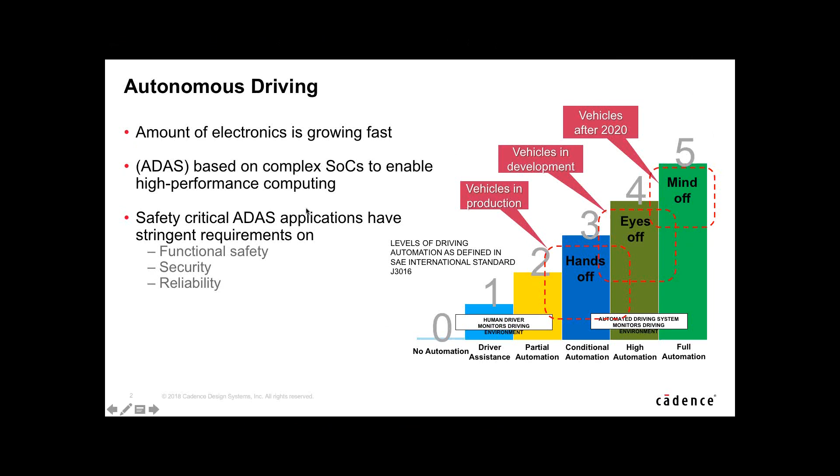As I think you've seen, the foundation standard for automotive safety is IEC 61508, and it has generated a number of standards around it that are all derived. And 26262 defines the processes we need to follow for safety verification, and it alludes to the system and functional verification as well. The overall system performance necessary, the documentation needed, and the tools compliance process. Today we're going to focus primarily on the safety verification aspects.

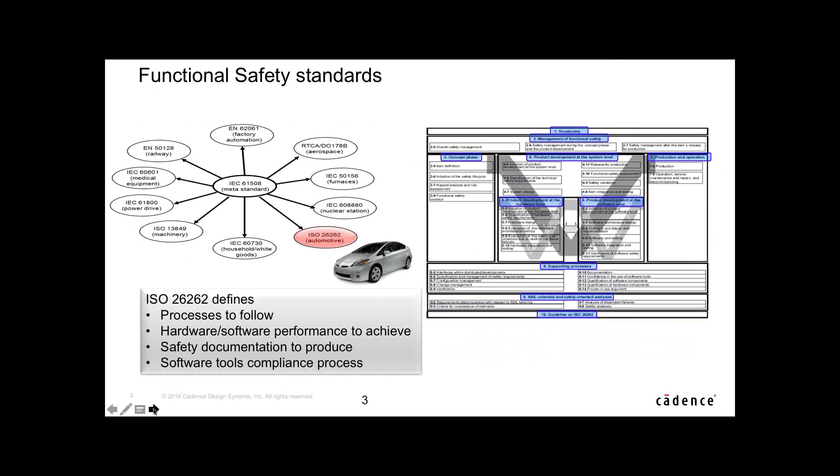Now, what we will address, and I think you've heard from some of the other presenters today, is a lot of the safety analysis that's been developed in the processes, the process we're talking about here, is 40, 50 years old and longer. The whole failure mechanism, identifying the effects, the diagnostics, this is a long-held process. TÜV SÜD, as OneSpin has represented before me, has been in business, I believe, for about 100 years, looking at safety systems. So it's not a new concept.

What we're all addressing, though, is the level of precise information that we need to generate in the semiconductor space, because the number of points of failure in these types of systems is much, much higher than we've seen in the mechanical systems that led to a lot of these standards.

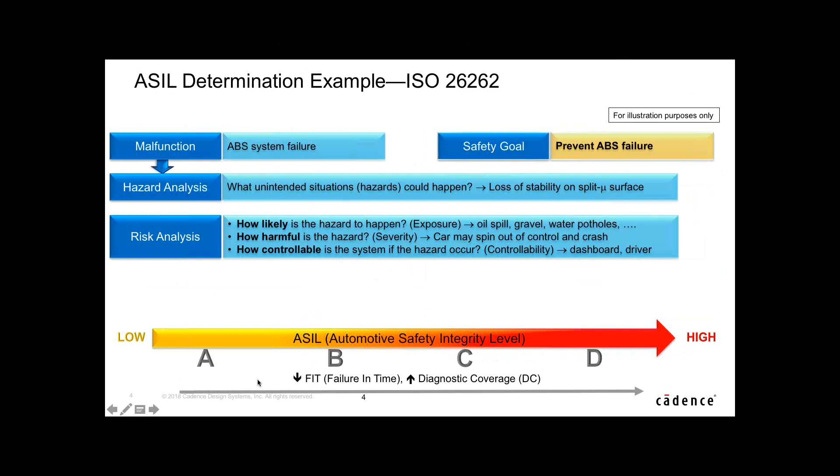So the safety principles: there's systematic failures, like a software bug. This should be addressed by processes of planning, the documentation, the specification. We need to make sure that systematic failures are essentially designed out and hopefully verified out of the system. Given stability in the systematic environment, there is always the possibility of random failures. Component malfunction, noise injection, aging. These are all different aspects. They may be permanent, they may be transient effects, and we need to define safety mechanisms in order to catch and observe these failures and then provide an appropriate system response.

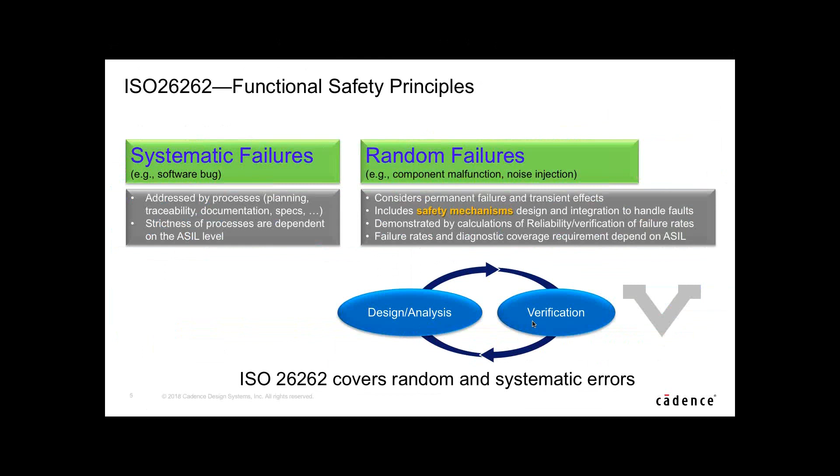The ability of the safety mechanisms to identify those failures is calculated into the reliability and verification rates, and we need to identify a diagnostic coverage requirement based on the ASIL that we define. So the ASIL is defined primarily on the potential failure, the diagnostic coverage, the failure rates associated. We need to make sure that the system can live up to that ASIL level. And that's really the challenge. And that's why you see that circulation here between the design analysis and verification, is that these elements are kind of co-developed, and we need to make sure that the system is whole between those two.

So what is the functional safety analysis? The definition of failure modes as we described, the determination of safety mechanisms, right? So we have to have a balance, right? And the balance here is that there needs to be sufficient safety mechanisms to achieve the ASIL level that we've defined, but we also need to maintain system performance, area, power, right? The normal constraints of the design itself.

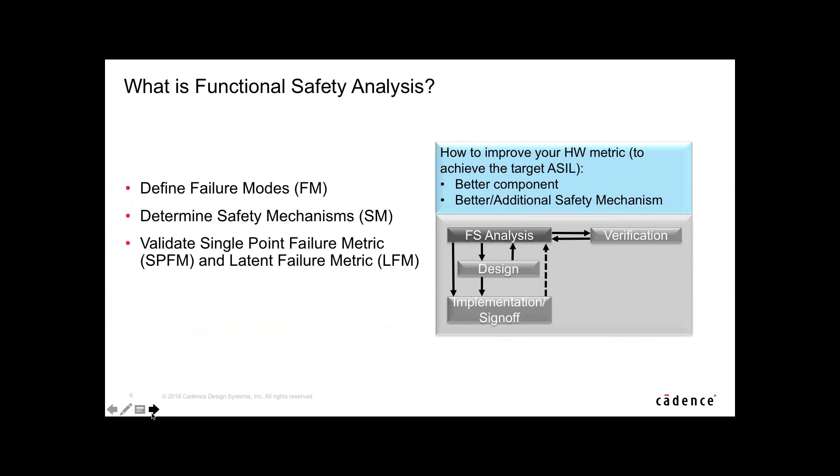And that's the balance that we need to achieve between the kind of systemic verification and the safety verification in our system. So defining functional safety, the typical approach, again, and this is the practice that's been conducted for decades in safety-related systems, is very structured. And it needs to be structured in part to make sure that we've obviously built this correctly, but it needs to be structured for audit and for failure checking should something go wrong in the system as well. Right? It's part of the documentation approach, is that it is structured throughout the process.

So define the failure modes, the mechanisms, the diagnostic coverage, feeding into the safety analysis, like a failure mode effect diagnostic analysis, and then generating the hardware metrics to demonstrate that we've achieved the goals of the FMEDA. Right? And you can see the ASIL levels and the appropriate failure rates. Right? This is straight from the ISO standard.

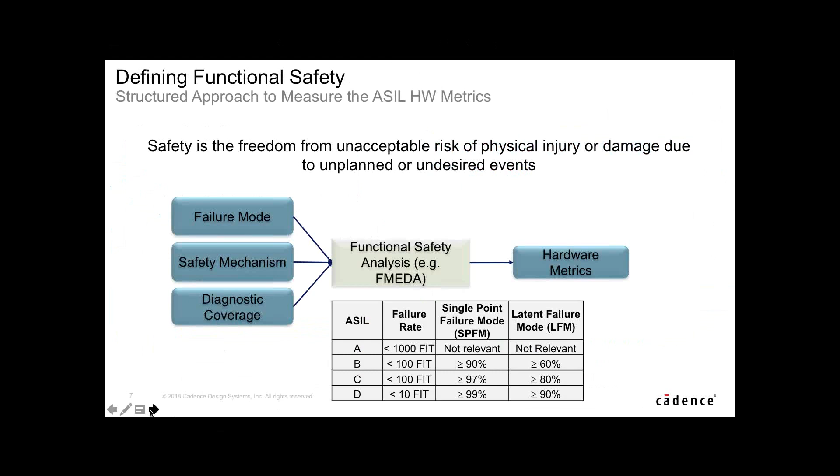So the importance of failure modes and failure mode effects and diagnostic analysis. It's a requirement in 26262. It's a requirement in the other related standards as well. Again, it's not a practice localized to 26262, but it's needed to verify the number of safety mechanisms, right, because they're connected to the failure modes themselves, and whatever diagnostic coverage properties are claimed, right?

So without automation, right, one way to address this is to have a safety expert analyzing the system using a statistical analysis, using historic trends, and identify a claimed diagnostic. That isn't sufficient, certainly in the level of complexity associated with a semiconductor.

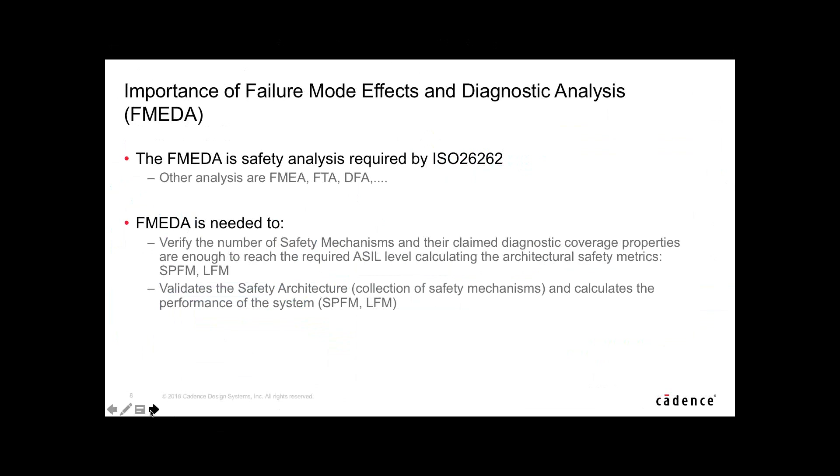And our observation over the past several years, we've been building technology in this space since 2013, is the requirements coming from the OEMs to the tier ones, to the semiconductor, to the IP providers, even to us as EDA, are increasing. There's an increasing need for detailed, calculated analysis. And I think you've seen some of that from my colleagues in the previous presentations. So what do we need to do? Well, we need to capture and analyze the goals.

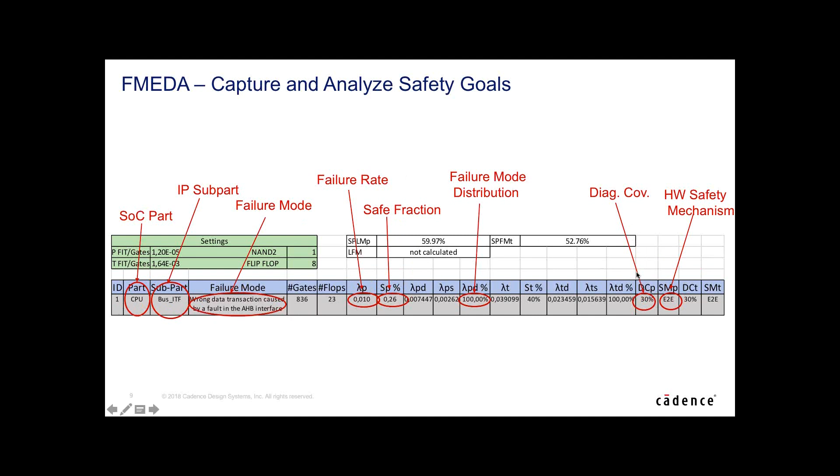All right, and our goal is to continue to do the simulation, the formal analysis, the hardware emulation, all of the analysis techniques that we can apply to improve these numbers to achieve the proper diagnostic coverage that we're looking for and the overall ASIL level.

So what we've observed, and hopefully you can hear this in the presentation, is that the systemic failure analysis, the functional verification, and the random failure, the safety verification, these are kind of mirrors of the same flows. And they really need to be in order for us to build workflows for this in our semiconductor teams, to leverage technologies that are known well working in these flows.

All right, so simply stated, on the functional verification side, should be quite familiar to you. Set of functional requirements, some type of functional management control that looks at verification plans, identifies tests, and submits that into a verification environment upon which we're going to run verification technologies such as formal analysis, simulation, hardware verification. This can be extended for analog as well. Gather coverage, track it back to the verification reporting.

On the safety verification side, you can see a mirror of this. All right, so the FMEDA is similar to that verification planning. We need to be able to run the diagnostic coverage, so that's the functional management, creating fault lists, optimizing or reducing the fault lists, and then running the campaigns with verification technologies that gather effectively the equivalent of functional coverage in terms of a comprehensive faults results database.

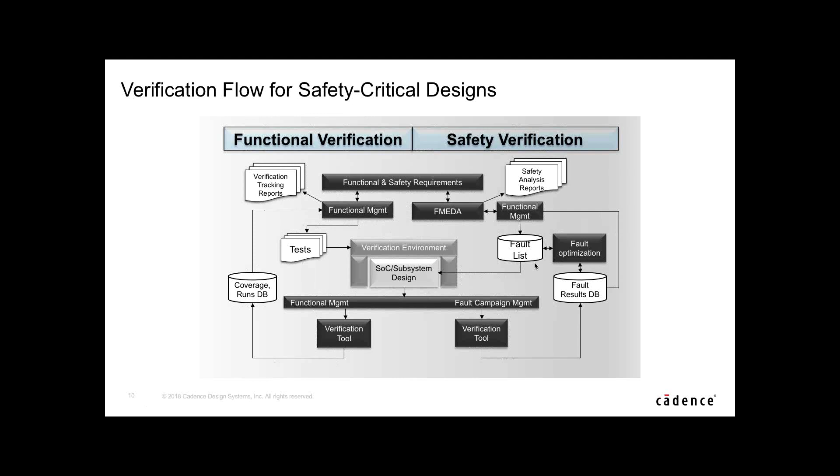So in detail, there is a stepwise flow. We do capture and analyze the failure mode effects and diagnostic analysis, prepare the fault campaign, run and rank the tests. Again, this is for optimizing our verification flow for safety: compile and elaborate, generate a fault database, reduce that fault through fault equivalence, undetectable faults, things like that.

Run the safety verification. Here, when we say good machine simulation, with the capture and the save checkpointing, these are all optimizations to generate fast simulation, whether it's a serial fault simulation or a concurrent fault simulation, and generate data, right? And there's a debug process associated with this as well for potentially detected faults, and that may include formal analysis to help us debug those potentially detected faults, or additional test generation. There are a number of ways we can go about that.

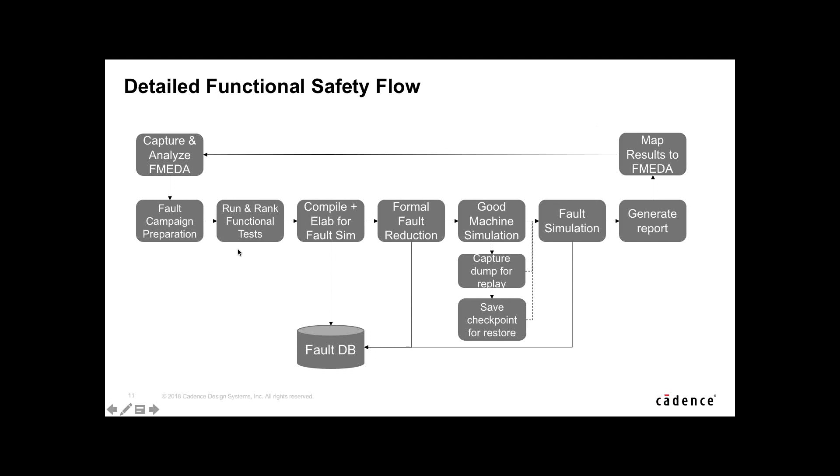And then we generate a report, map it back to the FMEDA, and determine if we've done enough. All right, so this could be an iterative process. And not surprisingly, my short advertisement here today, this is where our focus is. It's on technologies to fill each of the steps in this overall flow.

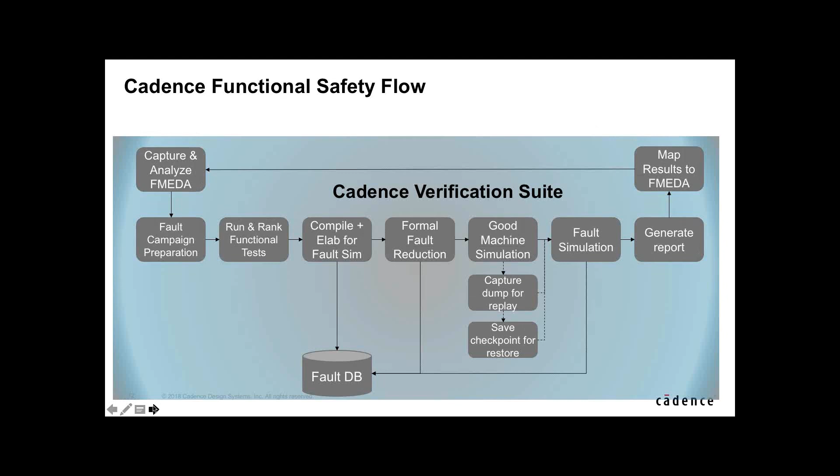So flow support, we start with an architectural FMEDA flow. That's a rough estimation of the overall metrics. We're going to do some analysis at that level, and that's sort of a projection. And we need to do that to determine if we have sufficient safety mechanisms defined for the FMEDA that we've developed. Right? So that initial analysis could lead to additional design work to add more safety mechanisms, something like that. Then we're going to get into the detailed FMEDA flow, the thing you saw on the previous slide.

That's going to do a fine-grained analysis, that is simulation per failure mode, to determine the effect of that safety mechanism and to develop the diagnostic coverage. That's going to lead to evidence, all right, and this is the simulation, formal, emulation evidence necessary to demonstrate that we've achieved the safety goals. All of that is traceable and recorded in these overall systems. Certainly, this is the tool chain that Cadence is developing and deploying with our customers today.

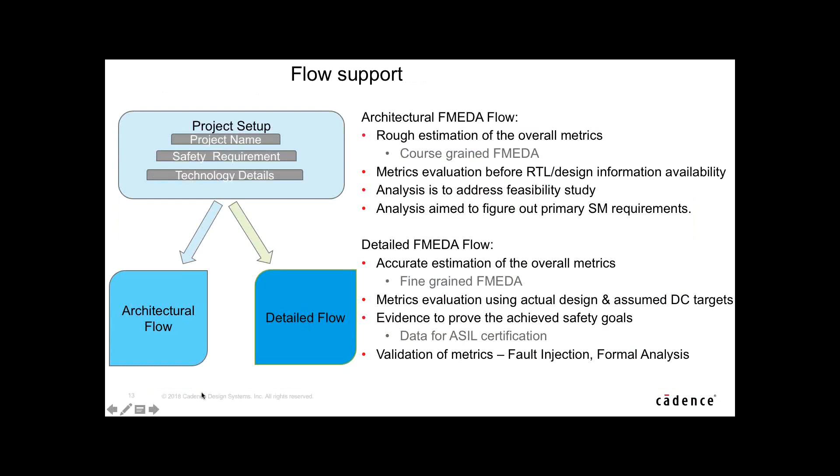And so, in summary, the flow needs to be integrated between functional and safety with the flows and engines. This is absolutely necessary. The safety solution needs to be incremental or added to the functional verification that you all do today. That's absolutely critical to making this part of the process and developing a safety culture inside your companies. We need a verification plan on the functional side with a similar FMEDA plan, and it all needs to be based on metrics and analysis so that it's traceable, recordable, and we develop the data proof that you need to go through compliance.

We need to automate that flow to reduce the human effort wherever possible. That's actually the main part of our engineering today. There's got to be an execution core. In the end, we do need to do some pretty heavyweight simulations and formal analysis. So these engines need to be optimized for turnaround time, that's the TAT, and optimized for general run speed. And that's absolutely what we're working on today. And we also just need to assure that we're not running wasted cycles. So fault reduction using formal engines, things like that, absolutely part of the flow. And that's what we're developing as a comprehensive solution for functional safety.